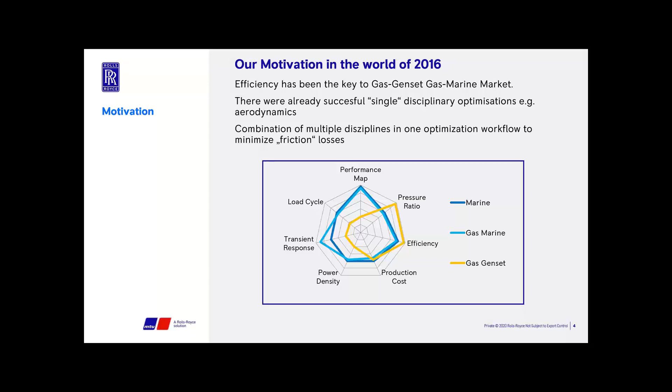All those specifications, all those needs, we saw would be best addressed with multidisciplinary optimization that should be fully automated.

So what did we do? I talked already about the optimizations. They will be explained in detail later by Johannes Ratz and Nicolas Lachenmeier, my colleague, also from Rolls-Royce Solutions.

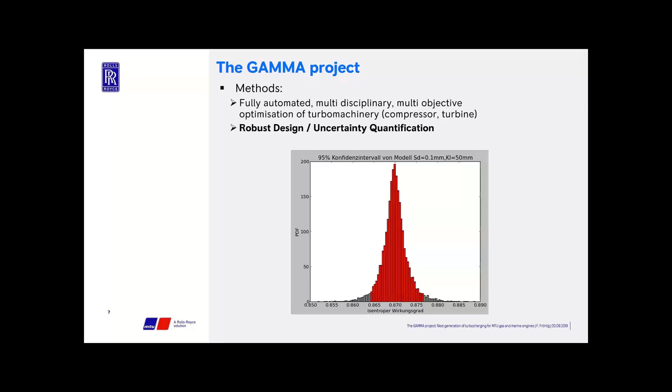We also wanted to step a little into robust design, because if you evaluate thousands of designs in a multidisciplinary optimization, this is something you get for free, so to say.

We also looked into two-stage turbocharging, a system combining radial and axial turbines with inlet guide vanes. We investigated also the system of a centrifugal compressor with vaned diffuser, especially the interactions between blades and vanes.

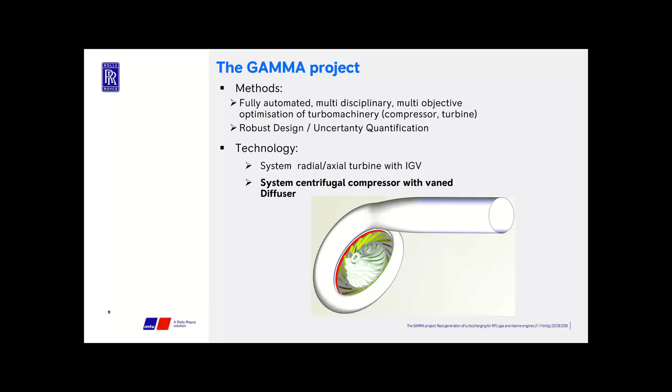We also calculated with NUMECA the pressure field for damping estimations. Then we had some sealing topics, bearing topics in there, which is of minor interest today.

But as an overall headline, we had also two demonstrators. One demonstrator is the high-efficient centrifugal compressor, and the other demonstrator is the compact two-stage turbocharging for marine applications.

So far an overview about what we did in the Gamma project, and I will come back later on with the achievements.

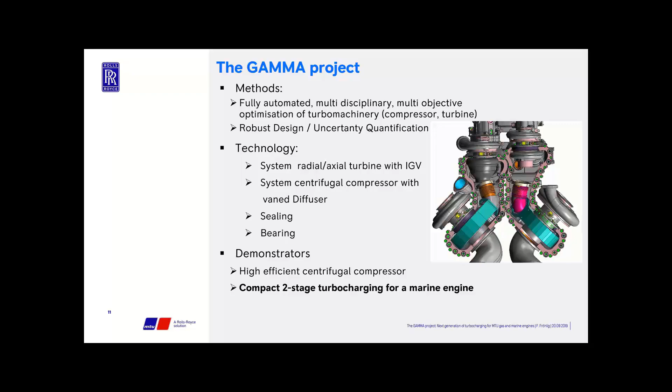Thank you very much for setting the scene of this project and what was involved. Let me take over. In terms of the agenda, I will talk a little bit about CAD modeling of the different geometries that were investigated during this project with our tool, CAESES, and explain a little bit where this fits in.

But today we will focus on the first component of CAESES, which is the CAD environment. CAESES is basically a very specialized CAD tool with a focus on geometry variation specifically, something that with many traditional CAD tools is rather difficult to do.

We want to be able to change geometries in a very flexible and robust way during the optimization process. For that we have this specialized environment with a focus on robustness, smart parameterization of the geometry, and simulation-ready geometry that can be provided directly to the next step in the process, and so on.

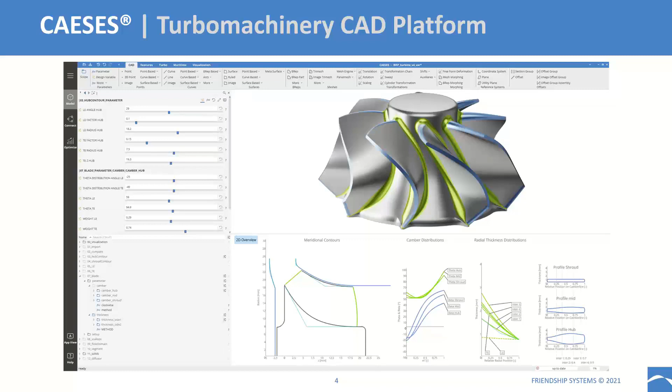This is just a quick view of the user interface to give you an idea how it looks, and just a few different turbomachinery applications: turbochargers, which is what we're talking about today, but also gas and steam turbines, propellers, fans and blowers, pumps, and hydro turbines.

So much for a quick introduction to what we're using and in which environment we're doing the following steps. Now let's come back to the R&D project Gamma and what we've done in terms of CAD modeling.

On this slide you can see the different components that we worked on and that were modeled within CAESES. On the compressor side we have the volute and the compressor wheel with the bladed diffuser, and on the turbine side we have the turbine wheel.

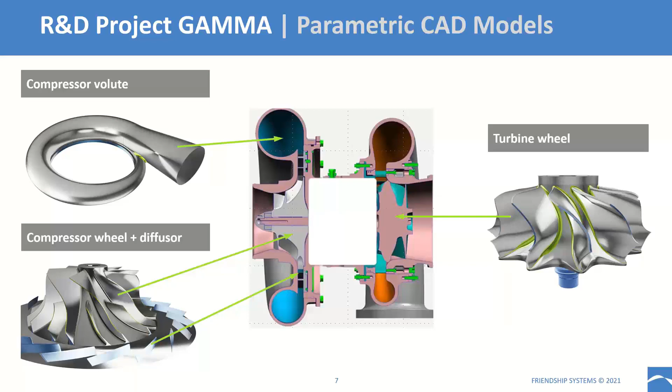The aims of the parametric models we created were first to implement the theoretical parameterizations provided to us within this project by Rolls-Royce Solutions as well as TU Darmstadt. They came up with certain ideas and parameters they wanted to use in the models, and we used that as input to implement the actual models.

Within the models we also took into consideration manufacturing constraints - we'll talk more about that later, as well as the experience in terms of manufacturing and other disciplines existing at Rolls-Royce Solutions. We want a high degree of flexibility in these models so we can cover as large a design space as possible, and we want them to be robust so we can do a very reliable variation of the geometry within the optimization process.

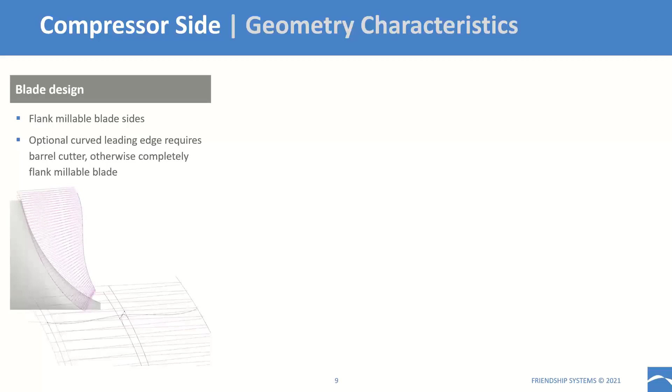Let's start with the compressor side of the turbocharger and look at some geometry characteristics. The blade design was intended to have flank millable blade sides, that's why we use these rulings - I'll mention more later. There's also the option to include a curved leading edge within the blade, which would require a different type of cutter for milling. If we have a straight leading edge, then we have a completely flank millable blade.

As mentioned by Fritz already, we have a vaned diffuser with parametric vanes, and the special thing here is that the shape of these vanes can change in circumferential direction, so they don't necessarily all have to be the same.

The geometry export here for CFD for the blade shape was exported in GeomTurbo format, and for structural mechanics we created a solid CAD segment that was exported in a CAD format.

If we look at the volute, we have a simple cross section made up of circular segments, and we had some constraints on the maximum outer radius and on the height of the volute.

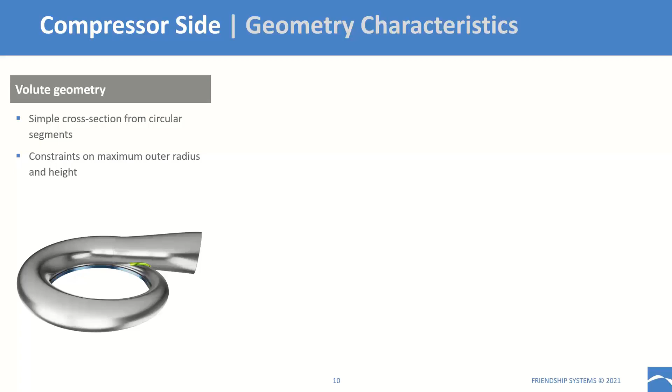Regarding the meshing, we also included support structure for the blocking of a structured mesh directly within the parameterization of the geometry - I'll give more details about this later. We also had the option to add a ported shroud to the compressor if it's necessary to delay the onset of surge.

Let's look at the modeling process for the compressor impeller. We start with the meridional contours, hub and shroud contour, and then specify the blade angle distributions or beta distributions at the hub and at the shroud. This allows us to create the mean camber lines of the compressor profiles on hub and shroud, and we can connect these two camber lines with a camber surface.

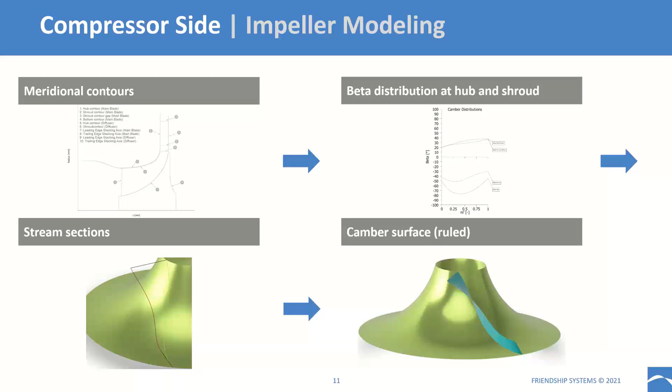As a next step, we specify the thickness of the profiles at the hub and at the shroud, and apply this thickness to the two camber lines we had defined before. Then we connect these two profiles at hub and shroud with so-called rulings, which are intended to guarantee the flank millability of the blade.

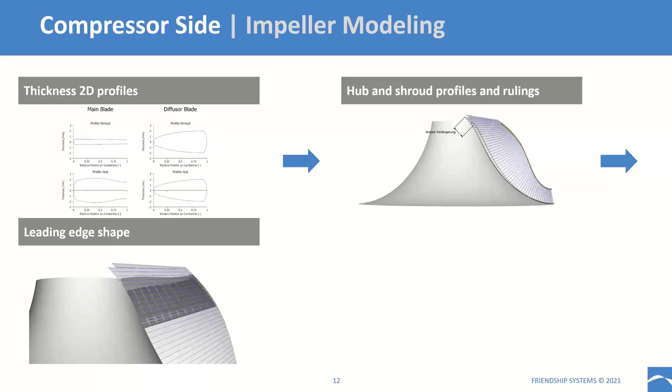Then we fit in between these two sides - they're extended past the leading edge, and between these two blade sides we fit the leading edge shape. Here we see a kind of curved leading edge, which wouldn't be flank millable, but it can also be straight. That gives us our main blade surface as well as the splitter blade, which is basically modeled in the same way as we've seen in this process.

Then as a second component on the compressor side, we have the vane diffuser.

As I mentioned, we have an individual parametric surface for each of the vanes, but they are generated in an automated loop. And we can change the parameters of the vane, including the airfoil parameters in spanwise direction, or height direction.

But we can also change the shape of these vanes in circumferential direction, to possibly take into account asymmetries in the flow that are due to the volute being non-axisymmetric, and things like that.

The inputs are either distribution functions for certain parameter values, which describe how a certain parameter of the vane changes in circumferential direction, giving us differently shaped vanes. Or, of course, these values can also be constant, and then that parameter is the same for all the vanes.

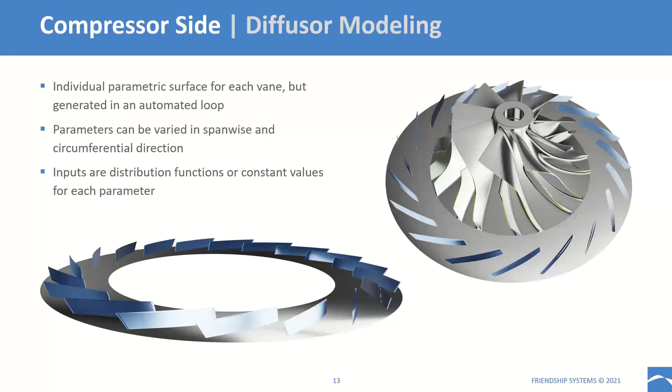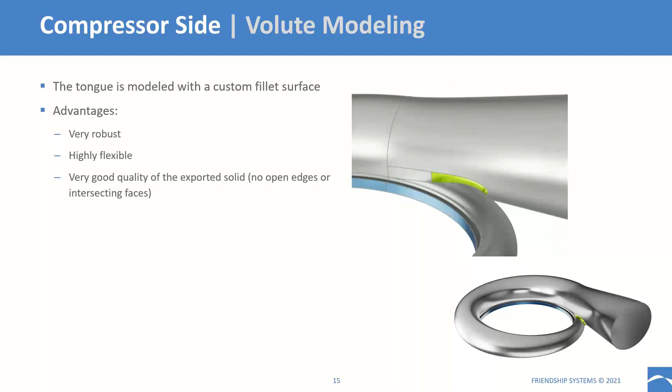It also has a very good quality of the overall solid that we export, because for meshing and so on later, we don't want open edges or intersecting faces, as that would throw stones in our meshing process.

Within the parametric model for the volute, we've included some preparation for the meshing process. For geometries like these volutes, it's quite difficult to create a robust structured mesh, especially when changing the shape very flexibly. The idea was to create a support geometry for the blocking of the structured mesh directly within the parametric model.

The support geometry is coupled to our geometry directly, so if we change the geometry, we can adjust these block boundaries very nicely, and then export the boundary curves to IGG for the meshing process, which we'll hear more about from NUMECA. And that's about the meshing.

Finally, on the compressor side, we had 59 parameters used for optimization purposes, related to the shape of the hub and shroud contour, blade parameters that control the blade shape, the diffuser vane, the impeller back which we don't see here and may not be aerodynamically interesting but matters for structural reasons, and of course the shape of the volute.

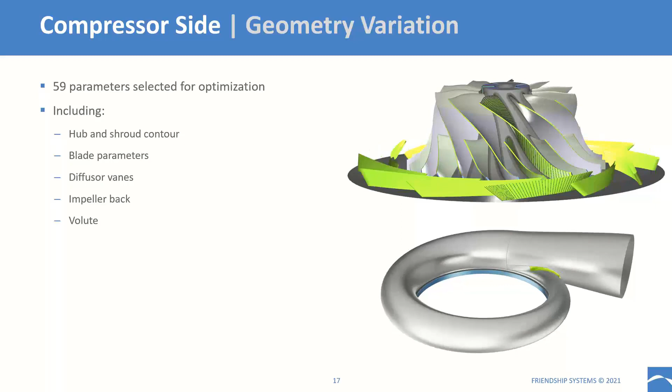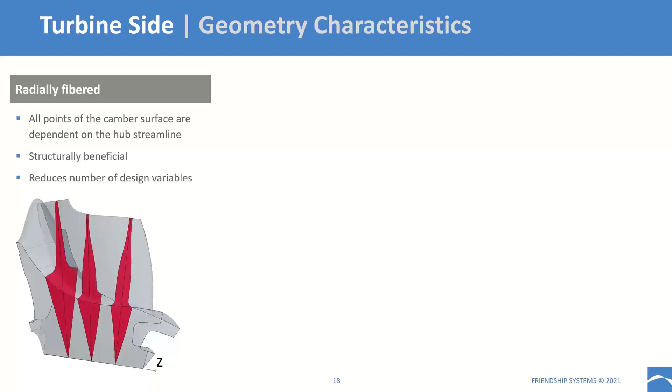There is also the possibility to add some end wall contouring to the hub, obtained by changing the hub contour. So if we have our meridional contour for the hub, rather than having a constant contour that is just revolved around the axis of rotation, if we change that in circumferential direction, we can get this contouring on our hub. That can be aerodynamically beneficial to influence the flow and secondary flow phenomena at the root of the blades, but it's also beneficial in terms of reducing inertia, so we can take off some material there, and we want a turbine with as low inertia as possible so it revs up quickly and shows good dynamic behavior.

And for the same reason, we can also add these scallops or webbings to the hub.

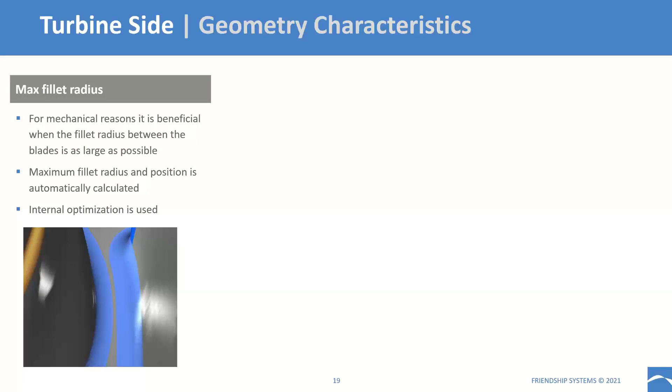In terms of structural integrity, the fillets at the roots of the blades are also quite important, and it's not very surprisingly beneficial when the fillet radius between the blades, at the bottom of the blades, is as large as possible. Here we included in the model an automated routine that basically calculates the maximum fillet radius automatically using an internal optimization, and then gives us the result we want.

In terms of export, we want to export simulation domains for fluid calculations and structural computations, and they have to fit exactly to each other, so they are generated directly from within the CAD model and exported. As we've heard, we were also looking into combinations of axial and radial turbines, and as a side note, this model or parameterization was constructed so that within the same parameterization we can also generate the axial variant of the turbine.

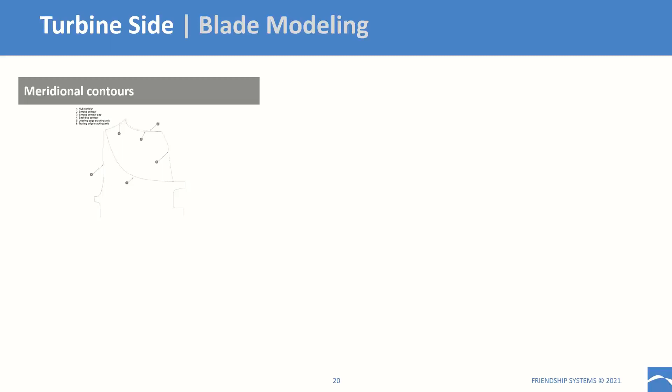So let's look at the blade modeling process for the turbine side. We again start by generating the meridional contours, hub and shroud, as well as the back disc contour. Then we generate the camber surface by creating a hub camber line, described here as a theta over m prime distribution. Theta is the wrap angle, and we describe how the wrap angle is distributed, giving us our camber line on the hub. Then, as explained before, starting from the axis of rotation, we extend the radial fibers through this hub camber line and generate the camber surface.

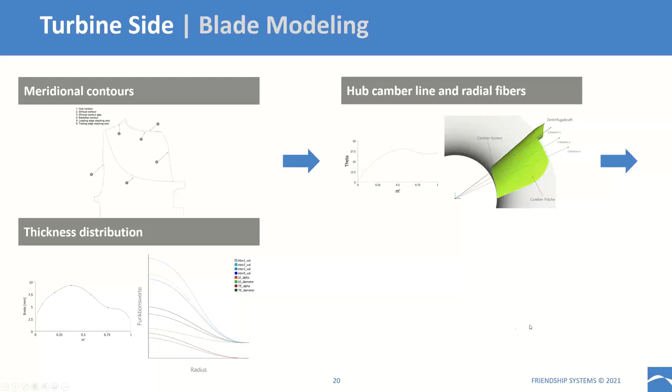Then we want to apply our blade thickness, and for that we have a parametrized cross section controlled by a few points along the curve, with values for the width position of these points in radial direction. If you look at these parameter distribution graphs, you see we start with high values for thickness at the inner radius, and then get thinner, and some of those points converge to the same value, so we just have a constant thickness. This gives us the blade surface.

On the turbine side, we had a total of 70 design variables within the model, and 40 of those were selected for the optimization process.

All right, that's it from my side about the CAD parametrization.

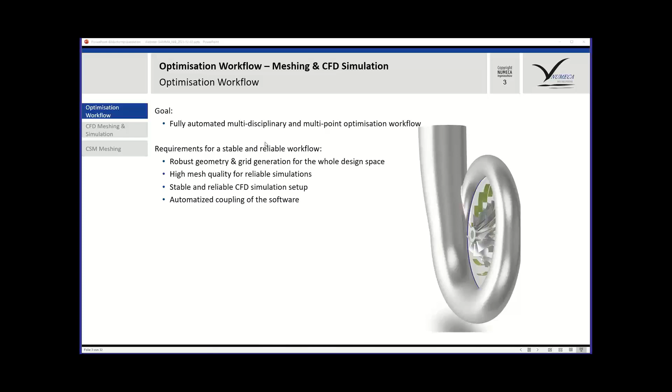The CFD simulation setup sounds trivial, but again, here you have to take into account the wide range of operating points and a lot of what-if this and that happens. And all that has to be coupled in an automated way, covering different softwares.

Also interesting is the case where an actually aerodynamically good design can be rejected because of meshing or geometry issues. In that case, we don't want to lose that promising design. We are going to redirect the optimization into a more stable direction.

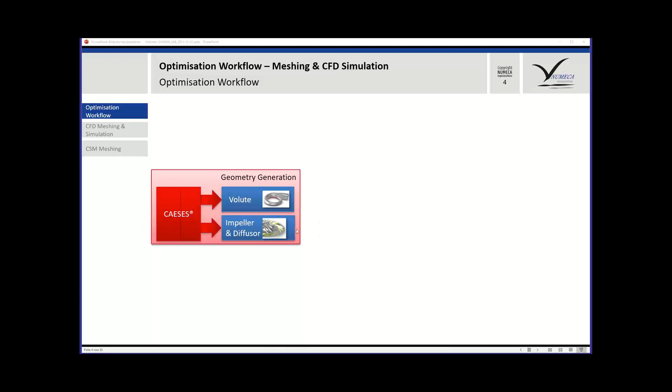The optimization workflow part you're seeing here has just been covered by Matthias. So CAESES delivers us geometry for the volute and for the impeller and diffuser. I'll cover that in more detail later.

What we do before we start the optimization, the first thing is to mesh the structural part. CSM stands for computational structural mechanics. So we mesh the solid body and simulate the structural stresses via Calculix, and then we go into the CFD. The reason for that order is quite simple: the CSM calculation takes a fraction of the time of the CFD calculation.

So if a design fails mechanically, we put that into the database in order to maintain the information of a faulty design, but we don't run the CFD simulation. The flow result of a design which is structurally not integer is basically worthless.

Then, in case of two successful simulations from the structural side and from the fluid side, we take the CFD and CSM result into the optimization loop. We use an artificial neural network in a genetic algorithm. So we have an adaptive response surface, we get an optimized design, we feed that into the database, we modify the parameter back into CAESES, and the whole loop starts all over again.

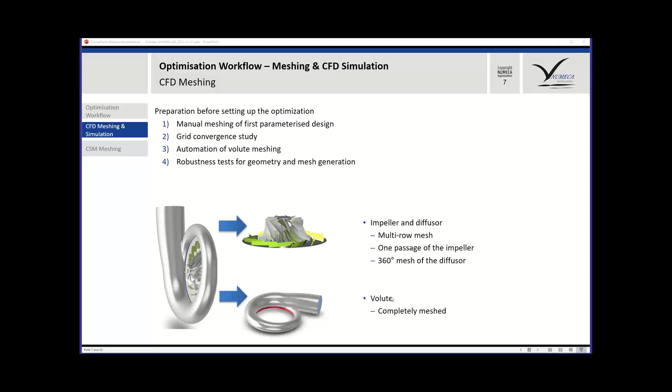Technically, we mesh the impeller and the diffuser. We have a multi-row mesh. We use one passage for the impeller, and a 360-degree mesh for the diffuser. The volute is also meshed completely, and then we stitch that together. Now let's look into that in more detail.

CAESES delivers us the impeller plus a vane diffuser in a parametric geometry generation. We export that as a geomTurbo file, which is a native NUMECA AutoGrid input file. It's a simple ASCII file, very clear.

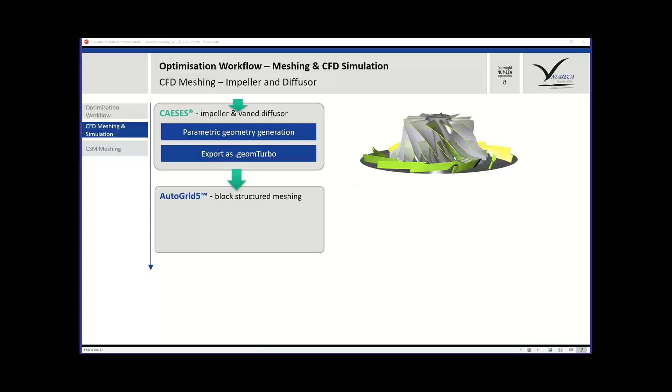We go into AutoGrid 5, which is NUMECA's block structured meshing tool for turbo machinery components, and run the mesh generation in batch mode. We use so-called templates, a model describing the mesh parameters, specifying how many points we have on the pressure side, how many on the suction side, in the tip gap, blade to blade, and so on. Working via templates guarantees that all the meshes are of similar quality and similar quantity. This is one thing you can do very nicely with structured meshes.

Finally, we export that mesh. You see here the compressor impeller, the impeller plus diffuser, so it's a multi-stage mesh. We incorporate the tip gap, we have blunt trailing edges in the case of the impeller, and we also take the real geometry of the bulb, meshing down to radius 0, into account, along with the blade fillets around the splitter blades and main blades.

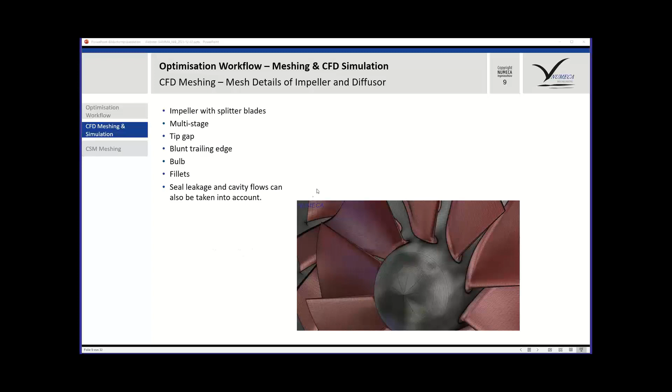We did not do that here, but seal leakage and cavity flows can also be taken into account.

Now let's come to the volute. Very early on in the project, we decided to use a block-structured hexahedral mesh for the volute. Many people would say this is a hell of a work, and they are right. It was quite some work, but we deliberately decided to go for a structured mesh in order to guarantee high mesh quality and fast solver speed. Typically, running a structured solver can be about 3 times faster than running an unstructured solver, and we wanted to take that advantage here in the optimization. So the decision was for a block structured hexahedral mesh.

The challenge is the tongue region. The rest of the volute is basically just a bent tube, so that's fairly easy to do. But where the tube matches the other tube, that can be quite tricky. This is the so-called tongue, and here you really have to think hard about what topology to use.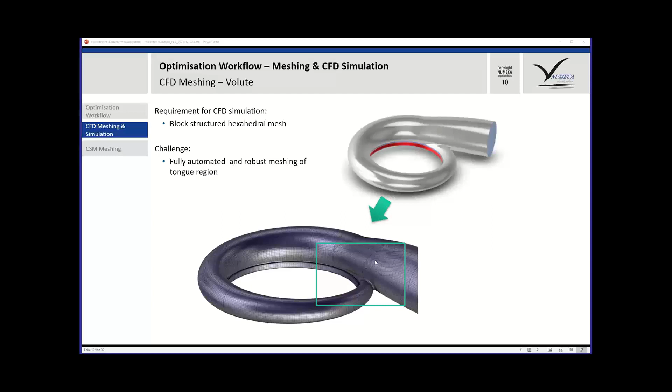Here's a close-up look, and you can already see the block structure is quite interesting. It was, as I said, quite a challenge to make such a block structure robust over a whole range of geometry variations. So how does a block structure look like in detail?

We used two rings: an inner ring, the red one, and an outer ring which wraps around the inner ring and closes into itself. Then we have a transition block here. This is the main topology we're using. There are many more details in the real world, but within the frame of this talk, that should be enough. This is a close-up of the mesh. It's not the actual mesh we use, the real one is quite a bit finer, but it should give you a flavor of the block structure.

Important, as you see here, is quite a number of curves. These are additional curves we use for stabilization of the meshing process, and here a very close interaction with CAESES came into play. CAESES delivered us these curves in a very parametric, robust way, which we had to use for that purpose inside the optimization. There was a lot of fine-tuning involved, and these curves were exported in Parasolid format into our mesh.

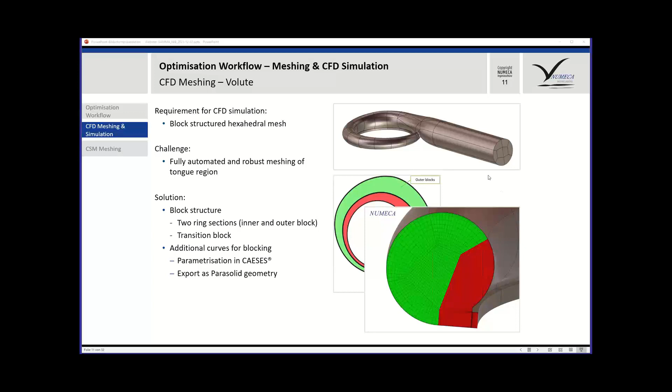So this is how a volute looks in CAESES, and we took these supporting curves for our meshing process, incorporated them in our meshing tool IGG, and started meshing. The entire meshing process here was script-based.

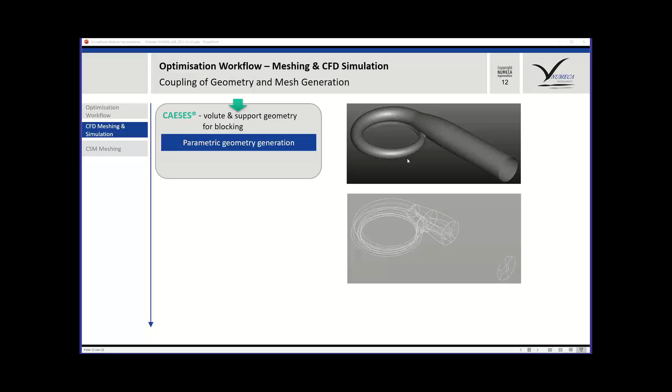Again, it's a Python script which reads in the CAESES curves and surfaces, and starts our meshing process. Export came from Parasolid into IGG, which is our manual mesh generator, which we did not run in a manual way, but in a script-controlled way here.

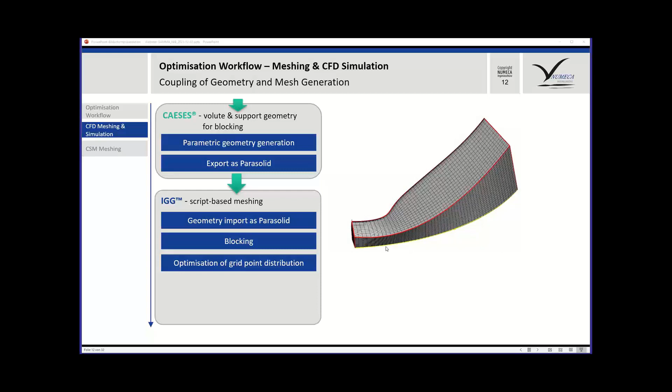And then the blocking started, as you can see here. And the next point was the optimization of the grid point distribution. And finally, we mapped the final mesh onto the final geometry.

You see here there's this discrepancy between the geometry and the mesh. We use the conformal mapping to put the mesh exactly on the surface. So out comes a meshed volute.

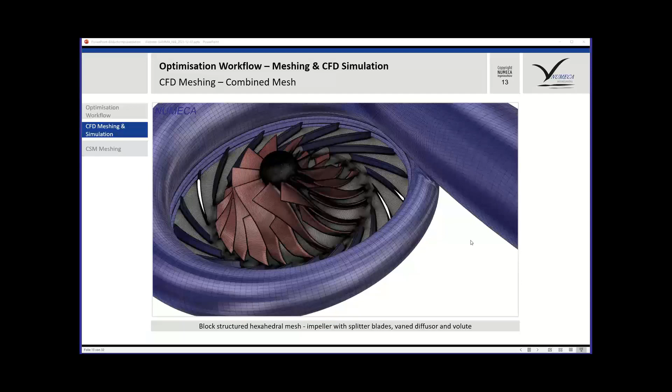And finally, we put all that together. So the volute, impeller, and diffuser is a close-up. And you see a beautifully structured mesh of a complete turbocharger impeller. Good, so far for the meshing.

How was the CFD set up? So here's the mesh, and we went into, put the mesh into Fine Turbo, which is our turbo machinery specific solver. It's probably the fastest turbo solver on the market. It's a structured solver, has a very high quality and reliability. And I think the simulation time we have here is really competitive compared to unstructured CFD solvers.

Again, full batching and scripting capability is important inside an optimization process. So here's a numerical setup. As I said, we have the full volute naturally, we have the full diffuser, and we used one passage of the impeller. Before we started, we made different studies on turbulence models, inlet-outlet boundary conditions, interfaces. So a lot of variables we had to play with before we went into the big optimization.

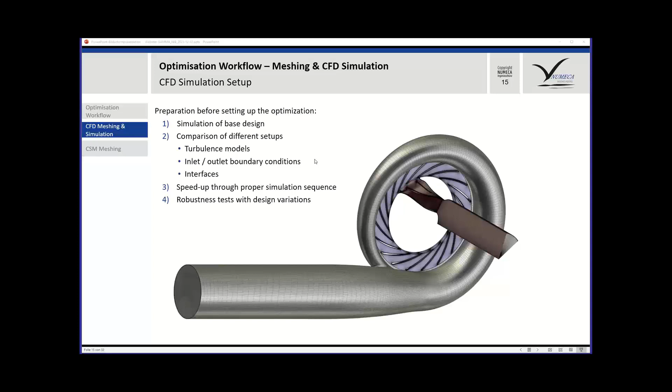Again, robustness tests were a topic here as well. We used for steady state simulation total pressure in the inlet. In the outlet, around the design point and stall point, we used mass flow, and at the choke point we used static pressure. So this is the beautiful mesh boiled down to the numerical setup.

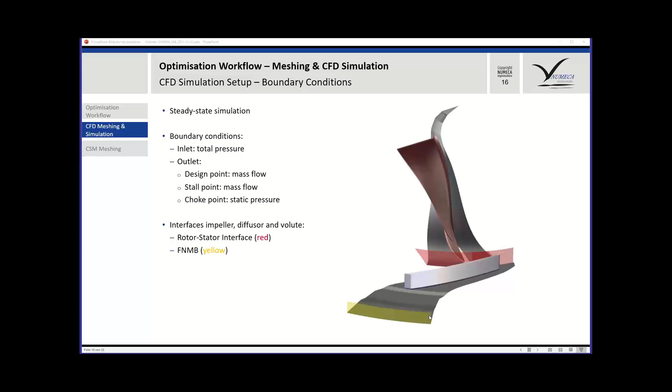You see here the solid surfaces. The red part is a rotor-stator interface. This is the diffuser blade. And here we have what we call a full non-matching boundary condition, where we connect the diffuser to the volute.

Good. If you run a multi-point optimization, you naturally have to run multi-operating points, and there are several ways to do it. So we have the design point, choke point, and the stall point. You can run all three points simultaneously on a number of processes, which in total speeds up your computational time.

On the other hand, starting an operating point very close to the stall can be a bit tricky. So we decided in most of the cases to take the design point as an initial solution, and from then we went to the stall point and the choke point.

In case a steady state simulation is not enough for the optimization, we considered only steady state. But for a detailed look into the flow, we were interested in the unsteady solution. We used the nonlinear harmonic method. The nonlinear harmonic method is a quasi-unsteady method.

I'll try to explain that in a nutshell soon. It gives you mostly an improved time mean flow solution. Even if you don't look into the unsteady results, your time mean flow is improved quite a lot. The continuity across the rotor-stator interface improves by using the nonlinear harmonic method. And we have no restrictions on the number of blades and blade rows.

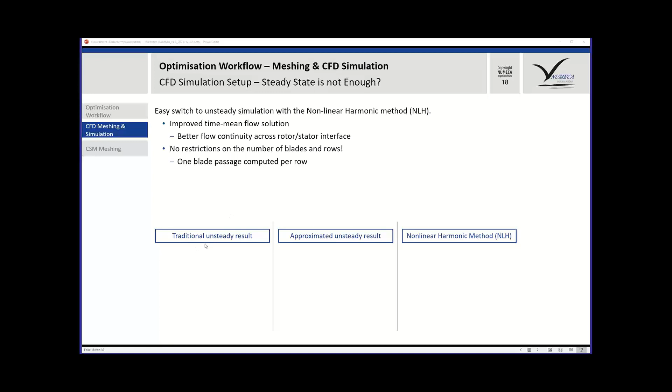Traditionally, if you use a classical time-stepping approach, you have the full model. So that's what we call a 360-degree model. You have to mesh the full impeller and the full diffuser, and then you step the impeller in tiny steps until you have completed a couple of revolutions. So this gives you big meshes and many time steps.

So what people try to do, when people try to take a shortcut, they find common integers between the impeller pitch and the diffuser pitch, multiplying the pitches a bit and then stretching them. So that works basically the same way as a full model, but with a reduced mesh. But here your frequencies are no longer the same because you play with the blade pitches.

So we're using a nonlinear harmonic method, taking only one blade passage into account for the impeller and one for the diffuser. We use here a Fourier decomposition. We're considering transforming the Navier-Stokes equations into the frequency space.

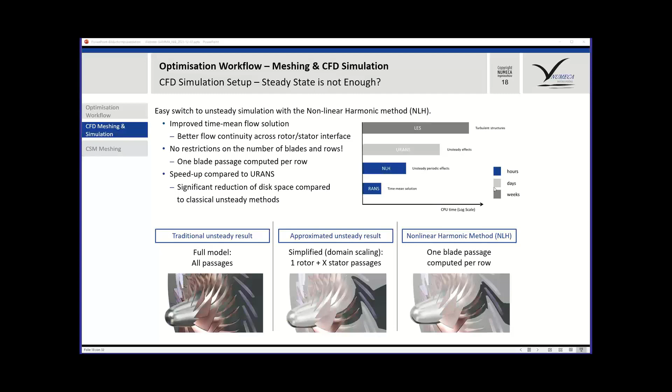Time-wise, the speed up is very considerable. Today, a RANS simulation takes a couple of hours, depending on mesh size and number of processors. The nonlinear harmonic method typically takes 10 times more time than a classical RANS simulation, but we are still in the range of hours, while a full unsteady simulation takes close to days and even weeks.

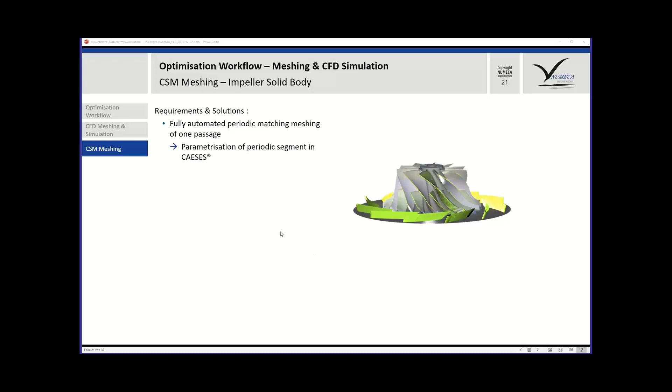Good. The final part here is the solid body mesh. How did we mesh the structural part? Again, CAESES delivered the geometry, a fully parametric periodic segment of that impeller plus splitter blades. You see that here, sliced through the cake, and the CSM solver Calculix we use accepts only tetrahedral elements. So our mesher delivered a hex dominant mesh, so we had to do something for that.

There were quite a number of requirements. We had to use more than one cell per blade thickness for accuracy reasons. The leading edge and fillet capturing should be as exact as possible, and we needed a matching periodic connection on both sides. We use the surface to volume approach in HEXPRESS/Hybrid, our unstructured mesher. We got the geometry segment out of Parasolid, and used a configuration file with a number of keywords specifying the main mesh parameters.

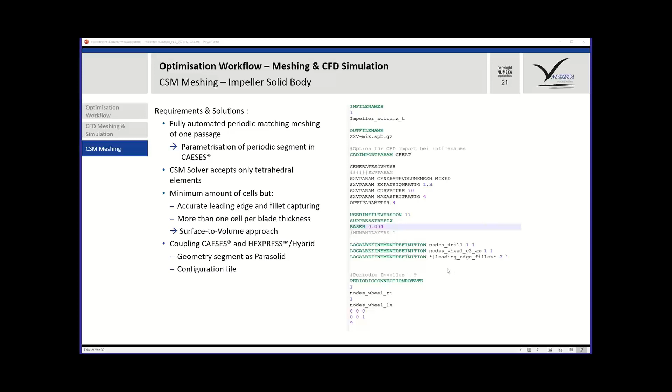So from CAESES we get the parametric model, exported as Parasolid. HEXPRESS/Hybrid first creates a hex dominant mesh with periodic matching connections - you see here that's mainly a hex mesh. In the next part, we split that hex mesh into a tet mesh, and then export it into Calculix.

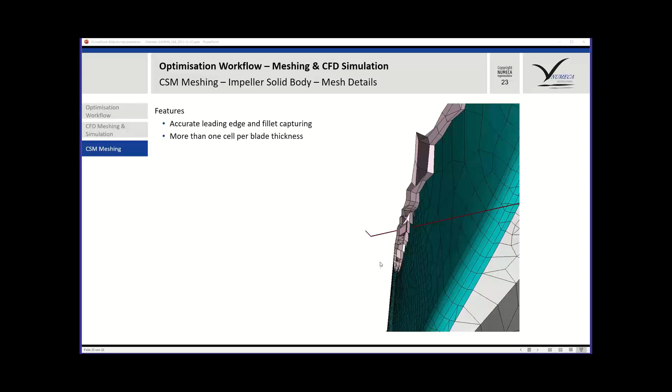As I mentioned before, you see here we have a fairly accurate capturing of the fillets, with between 2 and 3 elements over the blade thickness, and also a quite good representation of the leading edge. The mesh was periodic matching. So finally we got what we wanted: an impeller segment consisting only of tets, with all the quality requirements we imposed on the structural mesh.

So that was the entire optimization workflow, starting with geometry generation, to CFD meshing and simulation, the structure meshing, and all that put together into the optimizer, finally leading to a better design. That was my talk. Thanks a lot, and I'm looking forward to the Q&A.

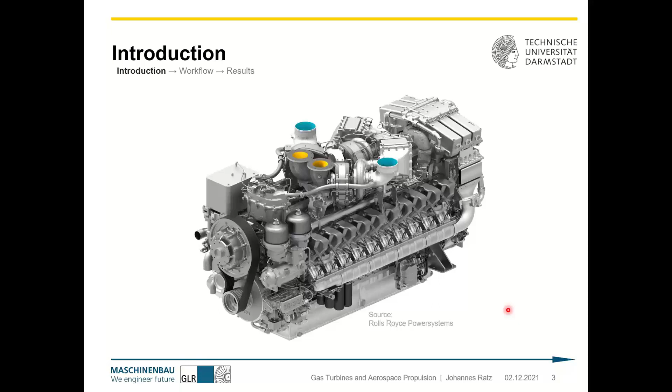And finally show the results of three optimizations I've done. So first, in general, to the topic: what is a turbocharger? A turbocharger is a part of an engine.

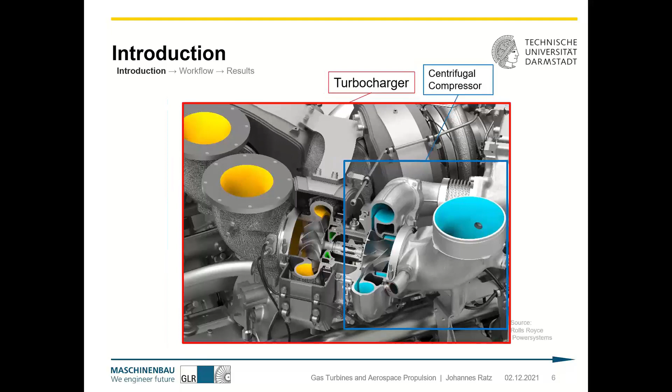Such a compressor is mainly characterized by a performance map: the total pressure ratio dependent on the reduced mass flow. You can draw those lines on the normalized rotational speed, so for a certain rotational speed at a certain reduced mass flow we get a certain total pressure ratio, and from that we get a certain efficiency. One objective which is quite clear is to increase the efficiency—the better the efficiency in the overall performance map, the better the efficiency of the whole engine.

But there's another objective we need to consider. If an engine accelerates, the turbocharger is accelerated along the full-load curve. If we want to accelerate the engine even faster, that full-load curve is shifted to smaller mass flows. The problem is we have something like a surge limit, and if the surge limit is crossed, normally the turbocharger is damaged or maybe completely destroyed. So the second objective during such an optimization is to broaden the performance map—to shift the surge limit to lower mass flows so the full-load curve stays completely inside our performance map.

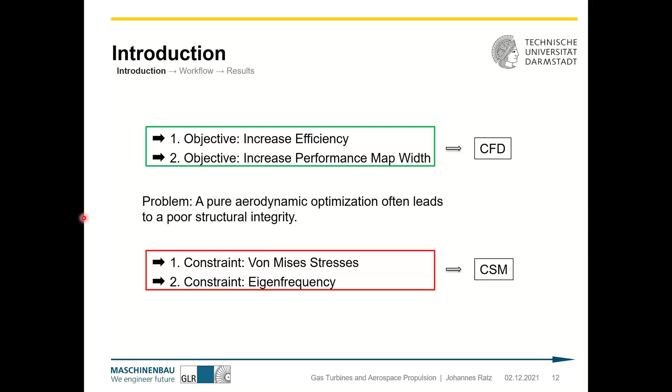So now we have our two objectives to consider during optimization: increase the efficiency and increase the performance map width. The problem is that with a pure aerodynamic optimization we often get poor structural integrity. So besides our CFD, we need to carry out a CSM, a computational structural mechanics analysis, to evaluate the von Mises stresses and the eigenfrequency of the impeller.

So far for that small introduction to what we want to optimize. Now I want to show you our optimization workflow. You already know that picture from Thomas: we have one optimizer placed in a framework—it can be Fine Design 3D, it can be CAESES, or modeFRONTIER.

We're using a genetic optimizer, a multi-objective genetic optimizer, combined with meta surfaces to optimize the geometries. Those optimizers modify the geometry parameters, and then, as Matthias mentioned, CAESES gets those parameters and, based on them, creates the geometry—the volute, the impeller, and the diffuser. After creating the geometry, we go to the CFD meshing and simulation, afterwards giving the results back to the optimizer, which starts the next round with modified parameters.

So let's start with CAESES. Matthias showed many possibilities; I only show the ones important for exactly this optimization, which I'll present later in the results. For that optimization, we changed the complete impeller geometry, the diffuser geometry, and the volute geometry—so we did a simultaneous optimization of all three parts.

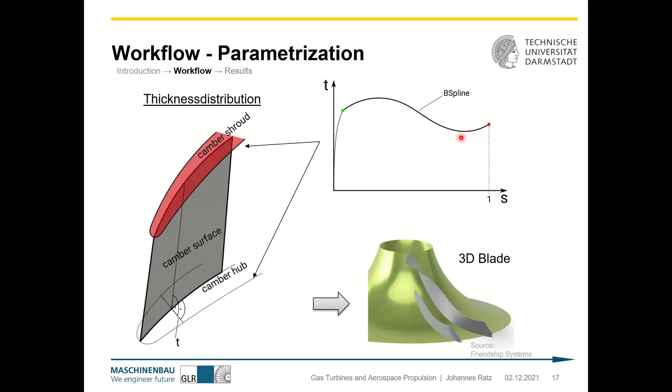The main blade and splitter blade are mainly modeled the same way. What we do is give a blade angle distribution for the main blade at hub and shroud, and use that same distribution for the splitter blade, adding small variations. So the splitter blade mainly follows the main blade, but its blade angles along the camber surface can change a little bit in both directions.

As I said, we don't only want to create a domain for the CFD calculation—we also need to define the impeller back, to mesh the solid body for the structural mechanics calculation. For that we change the length of the impeller, an angle at the back, and, quite importantly, the length of the back—this is very important for influencing the stresses in the rear part, which are often too high.

Getting to the volute, one parameter I haven't mentioned before is the clocking position of the diffuser. So we're not only varying the blade camber of the diffuser, but also the complete rotation, the clocking position, so we can change the impact of the flow which is hitting the volute tongue.

Going to the volute parameterization itself, it's mainly parameterized by the A to R ratio and the board angle. Looking at that cross-section, the A to R ratio is defined by the area of the cross-section divided by the radius from the center of that cross-section to the rotational axis. The overhang value is mainly that angle, which makes it possible to move the volute a little bit more out or in. So both values, the overhang or board angle as well as the A to R ratio, are varied around the circumferential direction, from 0 to 360 degrees.

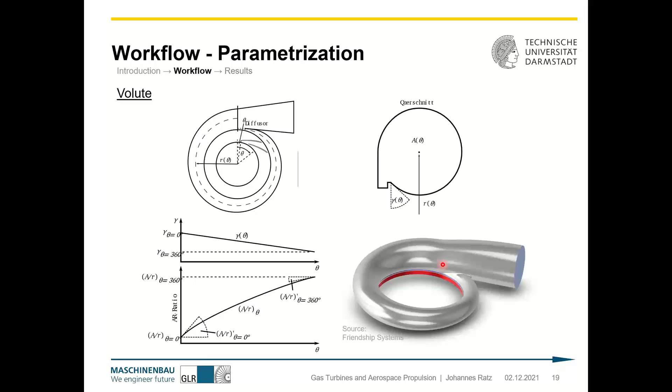The board angle is parameterized as a linear function, whereas the A to R ratio is parameterized by 4 values, so it's not only changed by a linear function, but a logarithmic shape would also be possible, whatever values we choose for the derivative at the beginning and end of that line. Finally, we get a quite nice value for later CFD calculation.

So finally, we have a parameterization for hub and shroud, main and splitter blade, diffuser blade, impeller back, and volute. And that optimization I'm showing now had 56 free parameters.

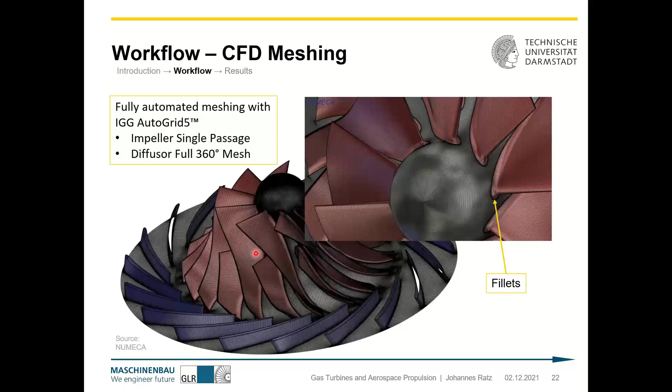Now after our geometry generation, we're going to the meshing of the CFD. You already know these pictures. We have a fully automated meshing process within NUMECA AutoGrid 5. The impeller blade is a single mesh. The diffuser mesh is full 360 degree. And we are including the fillets.

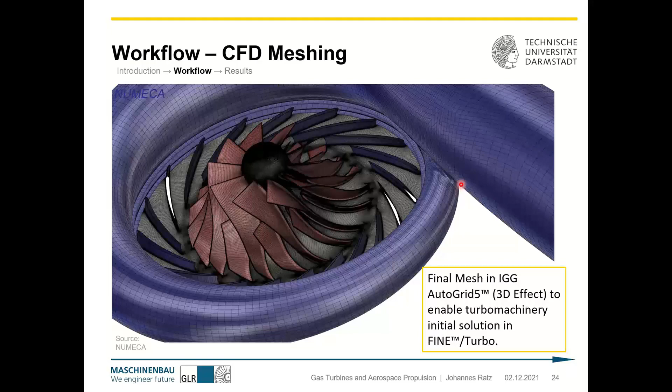The volute as well is automated block structured within IGG, and those meshes are then combined in AutoGrid 5 with the 3D effect. It's quite nice because later during the CFD process we can use the turbomachinery initial solution. For those involved in NUMECA, or in CFD in general, it's sometimes quite hard to get a start solution for a geometry, and that turbomachinery initial solution guesses the pressure inside the whole geometry, so the start for the CFD is more smooth, and the CFD is more likely to converge.

We are going to CSM meshing, so we implemented 2 ways. One is the way Thomas showed. Another way is with SimLab from Altair. I'll give a short talk again about the hex-plus hybrid method.

First we create a hex dominant mesh, then use the data mapper to transfer the hex dominant mesh to TET4 elements, then use the open source Gmsh to transform the TET4 elements into TET10 elements. And that's very important: in the first step we only use those TET4 elements, and to get a mesh independent solution for that case, we need a really fine mesh. But using that TET10 element mesh, the mesh can be much more coarsened to get the same results.

Finally, that's a small problem, maybe from Gmsh, or at least for us it was a problem: the Gmsh format is not executable with Calculix, so we had to write a small Python script which transforms the Gmsh format into the Calculix input format. Then we could finally calculate that mesh with Calculix.

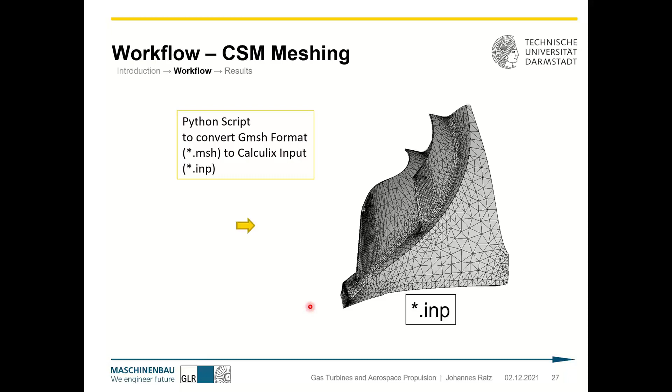Now, having our geometry and our meshes, we can go to the simulation, starting with the CFD simulation on the left side. That's our domain. We have a single passage for the impeller using periodic boundary conditions, then a mixing plane interface before going into the 360 degree diffuser mesh, and then a full matching boundary condition to go into the volute.

We calculated, or considered, 3 operating points during the optimization process: one to evaluate the choke limit, one to increase the efficiency at the design point, and one highly throttled point to get an idea about the performance map width. With these 3 operating points, we can define our 2 objectives, the isentropic efficiency and the performance map width, and our 2 constraints, the total pressure ratio and the choke mass flow.

Going to the CSM calculation, Calculix gives us the first blade eigenfrequency and the max von Mises stresses at the main blade, the splitter blade, the fillets, the bottom, and the drill. So the constraints are the first blade eigenfrequency have to be higher than a certain level, and the von Mises stresses need to be lower than a certain level.

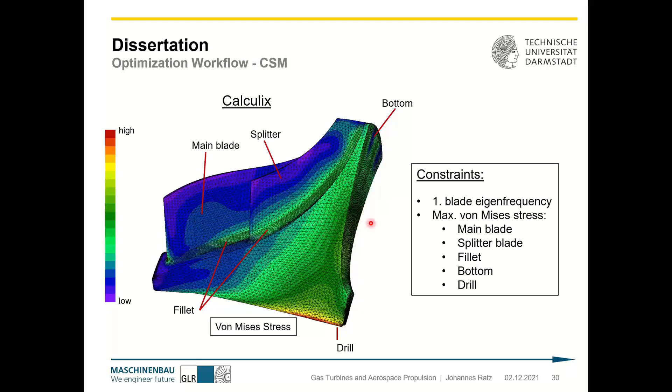Yeah, so that's the optimization workflow. So with that optimization workflow, we carried out 3 optimizations.

So the first optimization we carried out was where the impeller, diffuser, and volute were changed at the same time. The second optimization, which is based on the first one, we changed a little bit the parameterization of the diffuser. And in the third optimization, which is based on optimization 2, we changed the diffuser from a standard diffuser to a low solidity diffuser with the aim to increase the surge margin.

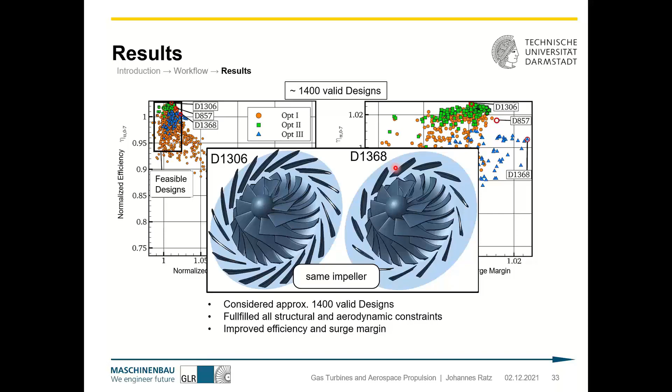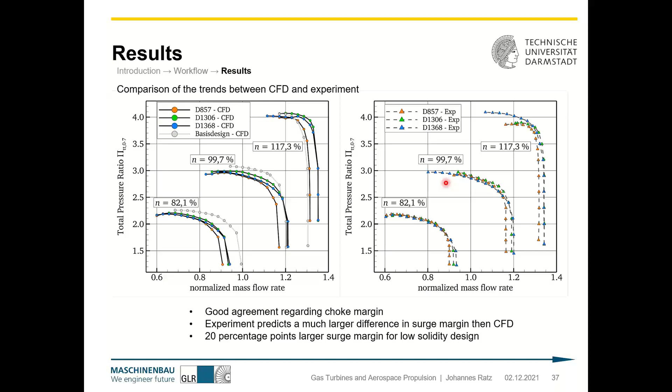So maybe a short look at why the total pressure ratio is lower and the efficiency higher between the designs. What we can see is the difference in total pressure ratio and efficiency compared to the baseline design along the full compressor. Compressor plane 1 is the inlet into the impeller, 2 is the outlet of the impeller, 3 is the inlet to the diffuser, 4 is the outlet of the diffuser blades, 5 is the inlet into the volute, and 7 is the outlet of the volute.

So we can see where the single designs are increased or have lower pressures compared to the baseline design, and the same for efficiency. Having a look at the total pressure, we can see that the total pressure rise is lower for the optimized design. That's mainly based on the impeller blade exit angle being lower, but after the impeller trailing edge, the total pressure loss is smaller than for the baseline design.

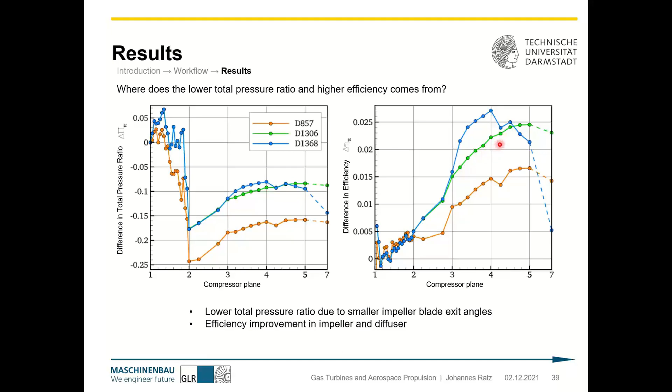Having a look at the efficiency, we can see that it increases over the whole flow path except in the volute. We already have an efficiency increase in the impeller and an even larger efficiency increase in the diffuser compared to the baseline design.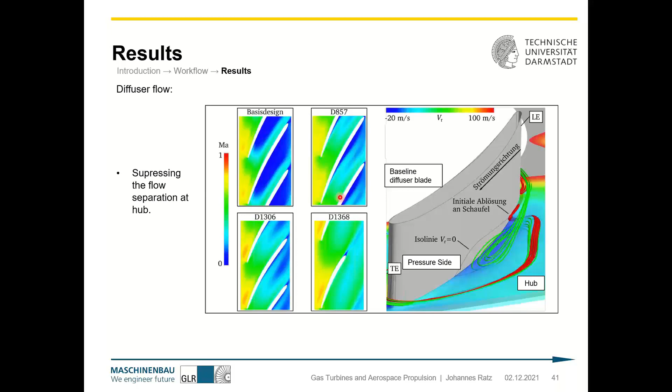That's the main reason why we have the efficiency increase in impeller and diffuser. To finally conclude this work: we created an optimization workflow for multidisciplinary optimization based on software packages from Friendship Systems and NUMECA. We carried out a simultaneous optimization of impeller, diffuser, and volute, and finally reached a 2 percentage point higher efficiency improvement, an absolute isentropic efficiency larger than 87%, and the low solidity design has a surge margin of almost 30%.

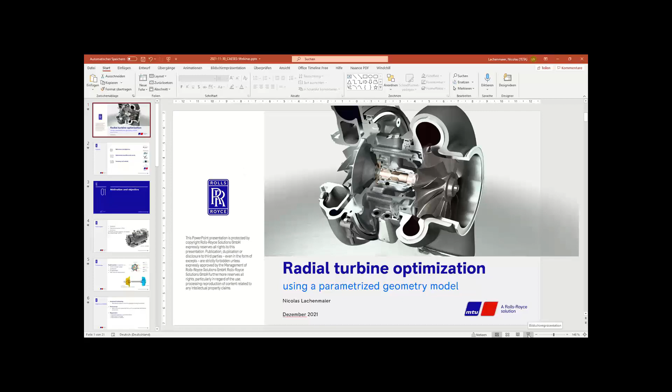Yes, okay, perfect. So I will talk a little bit about the radial turbine optimization that we conducted within the research project Gamma, and how we did that using the parameterized geometry model that Matthias introduced earlier this afternoon. I have a few slides prepared. I'll start with the motivation and objective, then I'll talk a little bit about the optimization workflow and the optimization results. And at last, I'll come to a short summary and an outlook, and talk about where we intend to go with all this work and workflows.

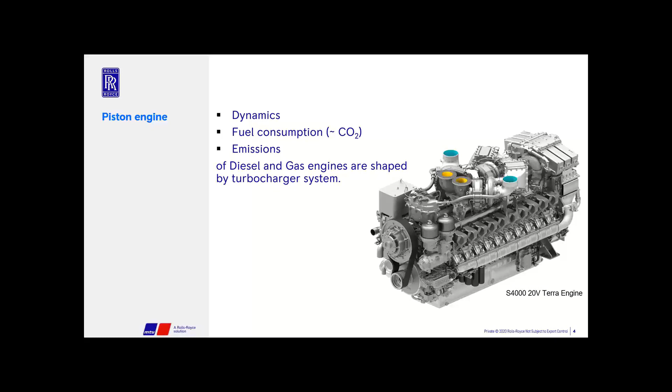Motivation and objective. As we've heard before in Johannes' presentation, the turbochargers that we develop are for these large engines that we see here. It's either diesel or gas engines, and the turbocharger system essentially shapes the dynamics, the fuel consumption, or the emissions of the engine in general. This is why we have a very keen look on the turbine and the compressor.

We just saw how Johannes worked on the compressor, and it was my job to design the turbine. What is the turbine supposed to do? Obviously, it has to deliver enough power, because the turbine is supposed to drive the compressor. It has to be efficient. It usually has to be as lightweight as possible, and it has to fulfill certain lifetime requirements. That is, of course, a very general way of looking at a radial turbine.

When it comes to the actual design, we find that it's very application dependent, whether or not, say, efficiency or inertia is very important or not. We sketched that here on the right, so you can see that for different applications, we usually have a different focus. And of course, the workflow that we developed should be able to take all this into account. Well, this is what we try to do.

So when we started Gamma, our main goal was to do some what we call analytical front loading. When we design a new turbomachine, a new turbine, we want to know as much as possible about the turbine as early as possible, and that is only possible if we have a full parameterization of the model. With that we can judge the turbine performance as soon as possible by means of simulation. Our goal was to create more efficient turbomachinery with comparable mechanical properties.

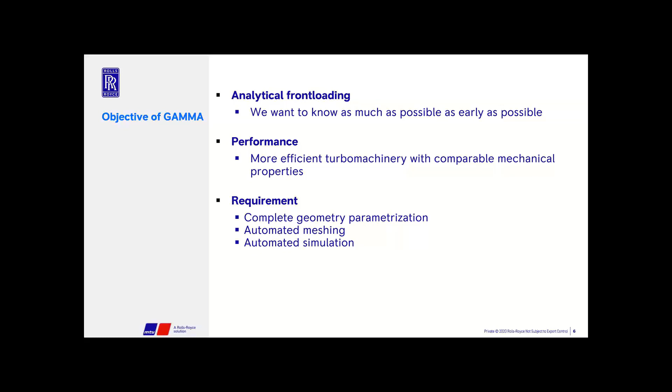So our requirement for the Gamma project was to get a complete geometry parameterization and build up an automated meshing and an automated simulation workflow that is then put into an optimization workflow in order to improve the turbine.

Which brings me to the optimization workflow, starting with the geometry parameterization. We saw that now in detail in Matthias' presentation, and some of it was repeated in Thomas and Johannes' presentation, so I'll keep it short. The three important steps to model a blade are as follows.

We also created several parameters to guide the thickness distribution from hub to shroud, so it's not necessarily linear, but we can have, say, an S-like shape, for example. As we've seen before, the model features some nice add-ins. For example, we can model scallops, which is very important for us. We can control the fillets in a very detailed manner. And of course, we can change a lot of stuff that usually is not discussed when it comes to optimization—for example, we have full control of the back of the turbine, and the front of the turbine can be controlled as well.

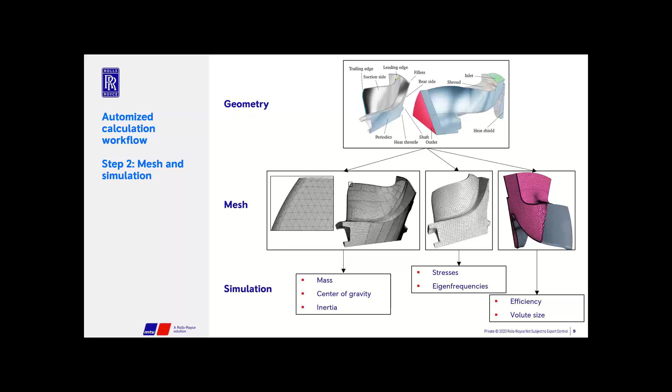Having automated all this, we can do an optimization. Usually we try to keep the parameters, the free parameters in the optimization, as low as possible. Usually we have something like 30 to 40 parameters in an optimization, which is still quite a lot, which means that we need to consider a lot of designs during the process.

The design, however, the parameterized model has much more free parameters. So I think the whole model has about 70 parameters. We just simply don't consider all of them during optimization, trying to keep the optimization effort as low as possible.

The optimization algorithm that we use is a genetic algorithm. It's meta model assisted. So the optimizer tests several meta models, such as, for example, radial basis functions or neural networks, and picks a specific meta model for each cost function that is considered, and checks every now and then if it's still the best one, and sometimes even does a switch during an optimization.

As I've said, we need to consider a lot of designs, which is why such an optimization process can take quite a while. Usually in my experience, it's more than 3 weeks, even considering that we have a lot of high performance computing power available.

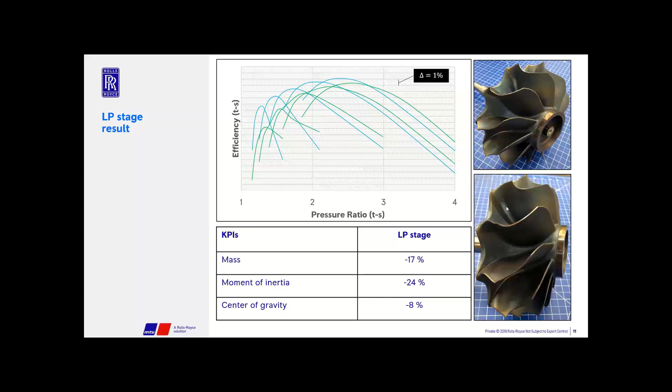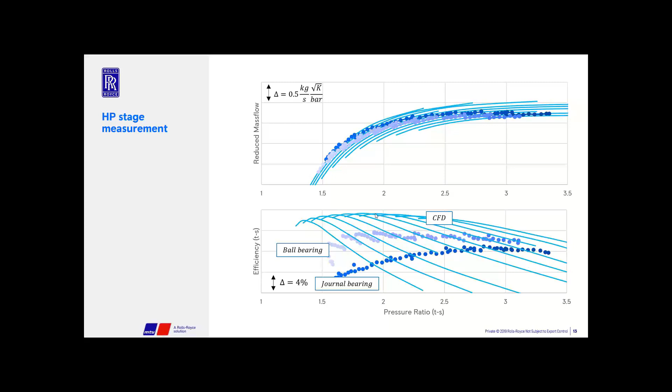Okay, this brings me to my last few slides, the summary and the outlook. But first, I would like to talk a little bit about the practical parts of turbine design.

And with that design, we went to the CAD design department. They created the full annulus model that then again went back to the solid mechanics team and was judged by them again, and also back to the aerodynamics team.

So we burned a lot of time in this traditional process, just pushing geometries back and forth. And this is something that drastically changed now with this new way of working, just because we now have a fully parameterized CAD model of the whole turbine.

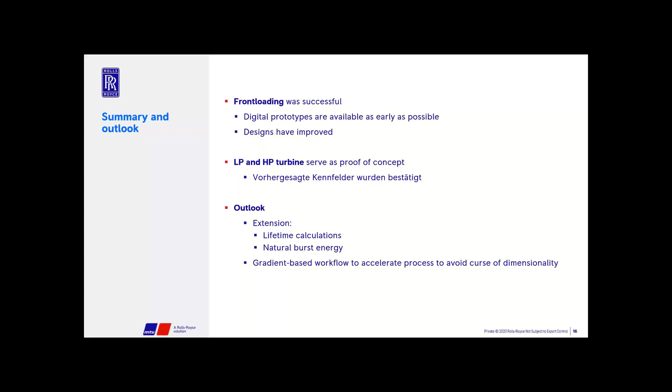So thank you for your attention, and please feel free to ask questions.

Thank you very much, Nico, for this great presentation. It's always good if you get to see some photos of real objects every once in a while, especially in the work that we're doing here at Friendship Systems. We see a lot of 3D models and CFD pictures, but sometimes it's good to see a real object.

So yeah, we've looked at the optimization workflows on compressor turbine side, and now I would like to give the presentation to Friedrich Fröhlich for final wrap-up, results and conclusions. Please, the floor is yours.

Yeah, thank you, Matthias. So the Gamma project, as you saw, helped us to provide perfectly tailored turbochargers to our future engines and fuel cells. One of the core parts was fully automated, multidisciplinary, multi-objective optimization.

So those two things, I think, are the basement of every good optimization workflow. I brought you some demonstrator designs we optimized with this, and I show here efficiencies because I want to show you how good this worked out at the end.

We saw here low pressure compressor. I have also the high pressure compressor, both with very high levels of efficiencies. I'm not allowed to tell the diameters of those wheels, but you see this really works out.

How did these results help us in a quick changing environment like today?

So when we started this project in 2016, it was so to say different times. We were going, or we are currently going through a pandemic, through a disruptive change of our climate.

And how does this help us? So at first, we raised the level of efficiency of our turbocharging for the gas engines, for the diesel engines, for the fuel cells. This itself saves CO2. High efficient turbochargers are, so to say, the entrance, the door to a lot of H2-based technologies like the H2 engine or the fuel cell. So this would not be possible with a normal turbocharger.

We also, as Nico already pointed out, saw a speed up in development timeframes. It's working quicker, and we don't need so many loops for a design. We also saw a speed up in time-resolved CFD, for example, for the damping estimation. We need pressure fields, transient pressure fields, and we really saw this speed up with NLH.

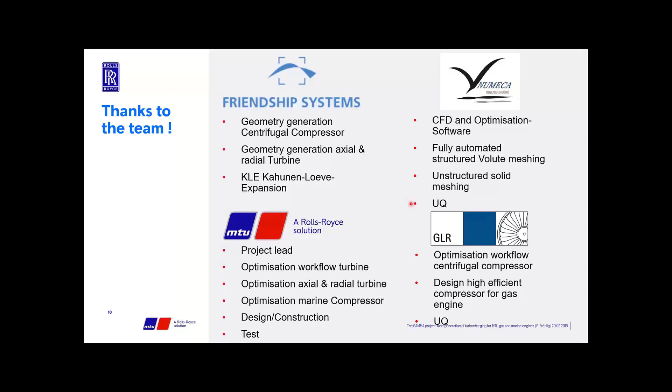Thanks also to Johannes Ratz and the GLR from Darmstadt University for the optimization workflow for the centrifugal compressor and the high efficiency compressor they designed.

So I also want to give my acknowledgements. This project has been funded by the BMWI. Thanks for funding and support to Mr. Benjamin Hamacher and Dr. Busse Gerstengaber and their team. It was very helpful, their advice, and they guided us through this funding process. Thank you for that. Okay, so I hand back to Matthias.

Great, thank you very much, Fritze, for these clear conclusions. It was obviously a pleasure also for Friendship Systems to work on this project. I think we have learned quite a lot in the field of turbomachinery design, which also helped us improve the level of service that we can provide, but also the tools that we provide to our customers. And yeah, it was really a fruitful collaboration.

So we are nominally at the end of the time that we had allocated for today's webinar, but I think we can take a few more minutes to answer some of the questions that have come in before we wrap up completely.